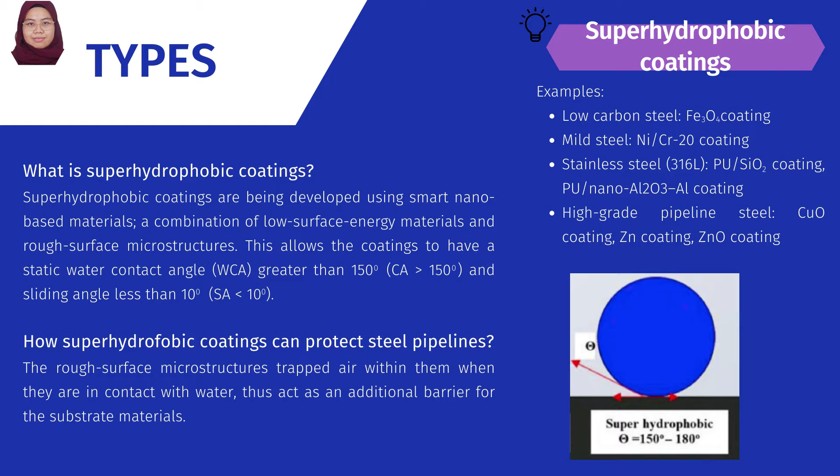How can superhydrophobic coatings protect the pipelines? The rough surface microstructures trap air within them when the coatings are in contact with water, thus acting as an additional barrier for the substrate material.

The second type of coating in the oil and gas industry is thermoset coatings, for example fusion bonded epoxy coating. A thermoset coating is made up of lines of polymers that are highly cross-linked by strong chemical bonds. Thin protective layers are produced on metallic surfaces.

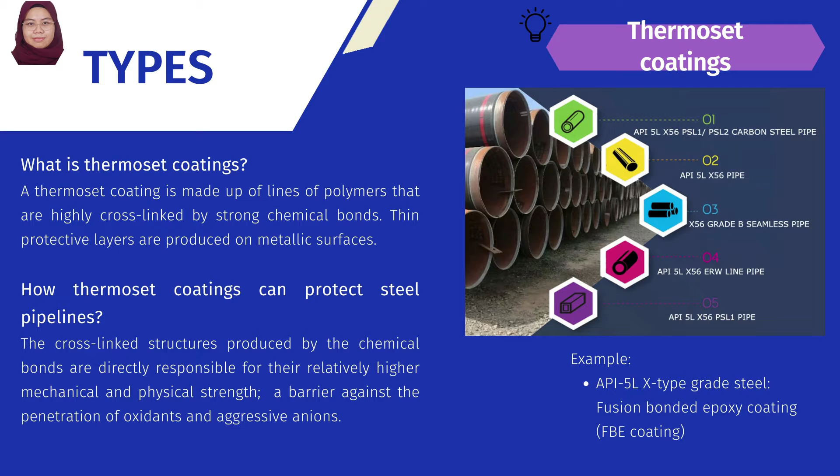How can thermoset coating protect steel pipelines? The cross-linked structures produced by the chemical bonds are directly responsible for their relatively higher mechanical and physical strength. It creates a barrier against the penetration of oxidants and aggressive anions.

Properties of polyurethane coating: polyurethane coating has excellent adhesion to steel, ductile iron, and concrete, combined with excellent chemical resistance, impact resistance, resistance to cathodic disbondment, and abrasion resistance. The fast-setting nature of 100% polyurethane coating also means they are very suitable for repeat application lines during pipe production, and they can be applied at any film thickness at virtually any temperature.

Moreover, the polyurethane coating can be used in conjunction with cathodic protection systems for protecting ductile iron and steel pipes, where the function of the coating is both to improve the degree of protection and also to reduce the capacity of the cathodic protection installation required to achieve complete immunity from corrosion attack.

Recent developments in 100% solid polyurethane coating technology have resulted in three innovations from which the water and wastewater industry can particularly benefit. First, the development of protective linings that incorporate antimicrobial additives. Second, altering the characteristics of the environment to eliminate the corrosive environment. Third, the development of edge-retentive polyurethane coating systems.

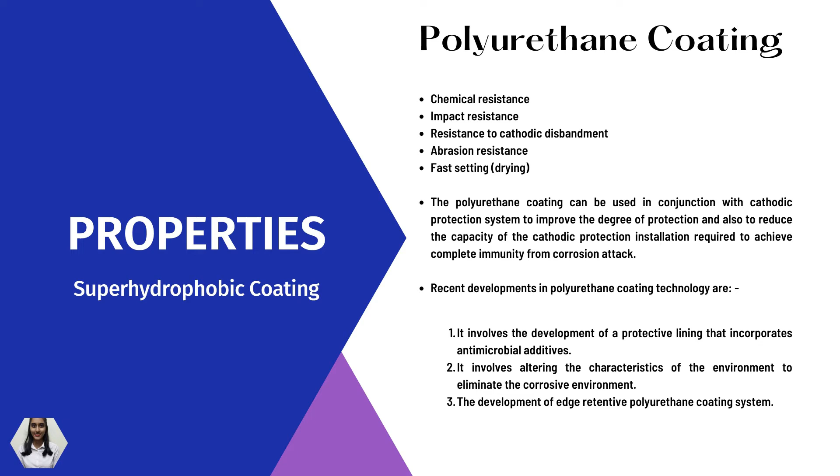Properties of copper coating: copper is a reddish-brown metal known for its excellent thermal and electrical conductivity. A common application for copper oil and gas plating is to prevent galling during make and break operations. A copper coating may be applied to parts and components such as premium threaded connections, couplings, risers, and alloy premium drill pipes for this purpose.

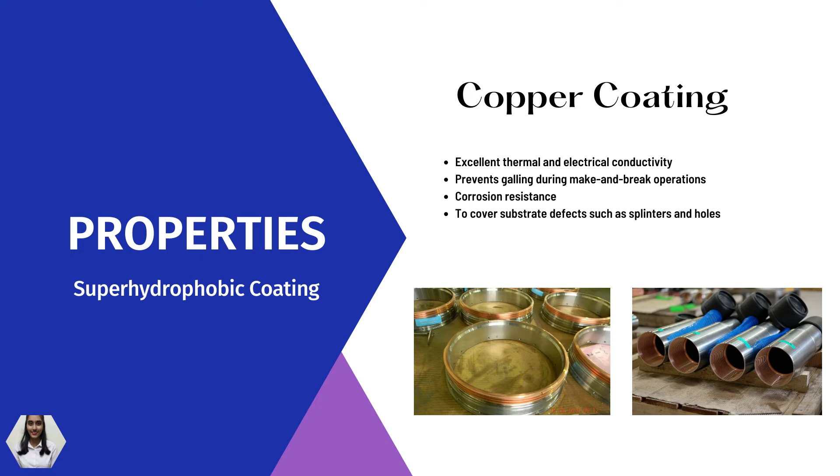Copper is also extremely useful as an undercoating for other plated metals to enhance rust resistance in high corrosion environments. When used as an undercoat, copper can cover substrate defects such as splinters and holes prior to application of the final deposit. Copper plating is compatible with many types of metals, including steel, stainless steel, and steel alloy, as well as aluminium and copper alloys.

Properties of nickel coating: nickel is a popular choice for many oil and gas plating applications because of its excellent anti-corrosion properties. A prime example is the selective plating of a nickel solution onto materials used in high chloride downhole operations.

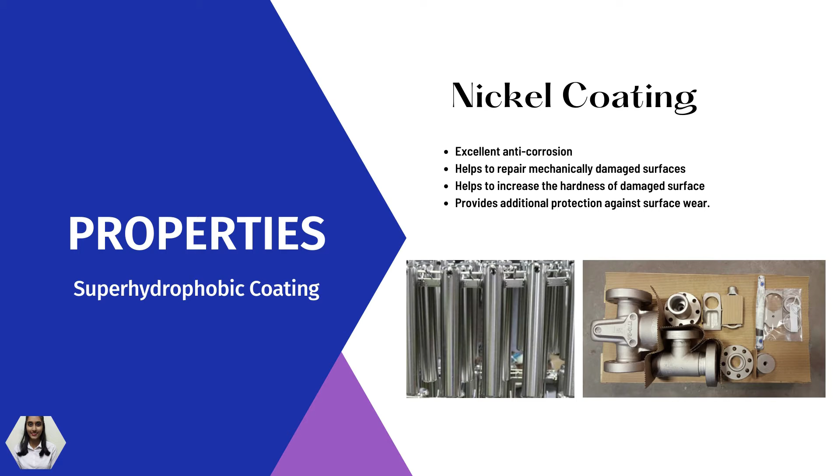Moreover, alloying nickel with copper is sometimes used to repair mechanically damaged surfaces in oil and gas operations. For instance, a plated nickel-copper coating can be applied to repair crown-mounted compensators on oil rigs that incur damage from a lightning strike. This plating technique increases the hardness of the damaged surface and also provides additional protection against surface wear.

Properties of fusion bonded epoxy: long-term corrosion protection. FBE has excellent adhesion to steel and provides superior long-term corrosion resistance and protection of pipelines operating at moderate temperatures for design life. Superior adhesion properties provide excellent resistance to cathodic disbondment, which reduces the total cost of cathodic protection during the operation of the pipeline.

Special grades of FBE are available for use at higher operating temperatures for coating of high-strength steels and other specific applications, offering good chemical and mechanical resistance.

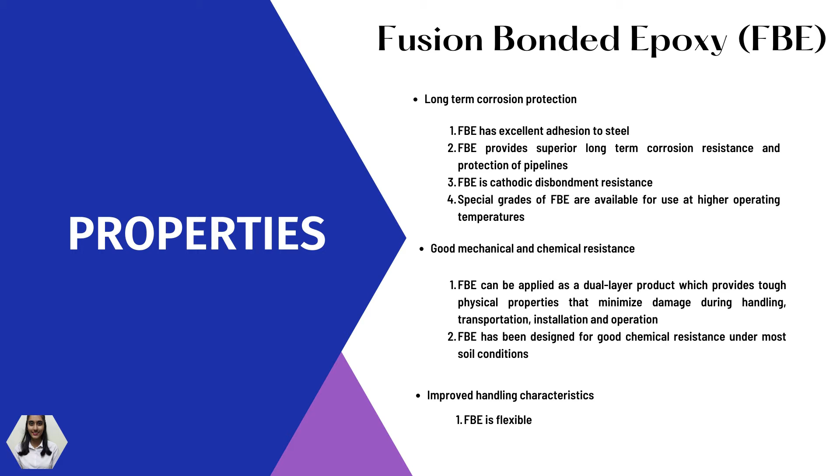FBE can be applied as a dual-layer product which provides tough physical properties that minimize damage during handling, transportation, installation, and operation. FBE has been designed for good chemical resistance under most soil conditions. Finally, improved handling characteristics: FBE is flexible and allows bending of the pipe for installations.

Method technology for surface preparation: blast cleaning. Blast cleaning is the most commonly used method for preparation of steel surfaces. It is efficient and economical compared to conventional surface preparation processes. It effectively removes rust, scale, slats, etc. from the surface and produces an industrial-grade cleaning and a rough surface finish.

The principle of blast cleaning is propelling abrasive media at a high velocity using compressed air in sandblasting or wheel blast machines onto the surface of a material. It uses abrasive materials like aluminum oxide, glass beads, and garnet. It is important to remove grease or oil contamination prior to blast cleaning, for example, by solvent cleaning.

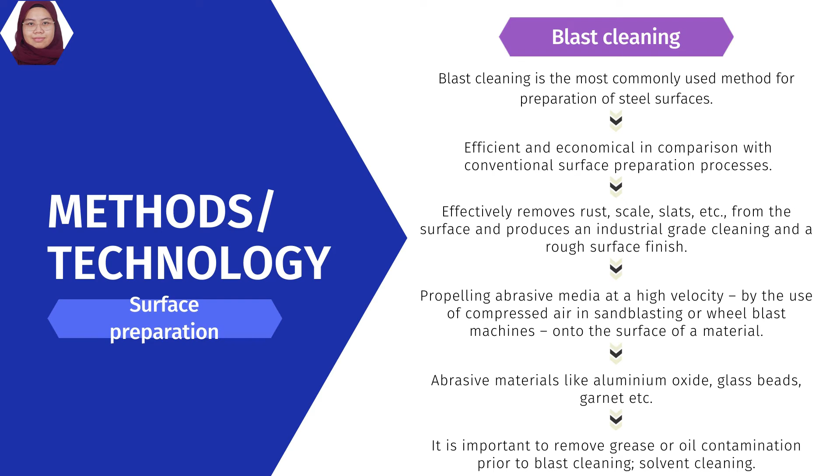Method technology for applying the coating: thermal spraying. Advantages of thermal spraying include reduced cost, low heat input, and versatility. Thermal spraying is the most versatile and widely used method.

The principle: semi-molten or molten particles hit the surface of the target substrate and become solid rapidly to produce a thin splat. Successive impingement brings about accumulation of the particles and interbonding among the splats. Classifications of thermal spraying include arc spraying, flame spraying, atmospheric plasma spraying, and many more.

For polyurethane nano-aluminum oxide aluminum coating technology, the fabrication process involves a two-step deposition process. First, aluminum coatings were arc sprayed onto stainless steel 316L plaques. Second, polyurethane nano-aluminum oxide composite deposition through a suspension flame spraying process.

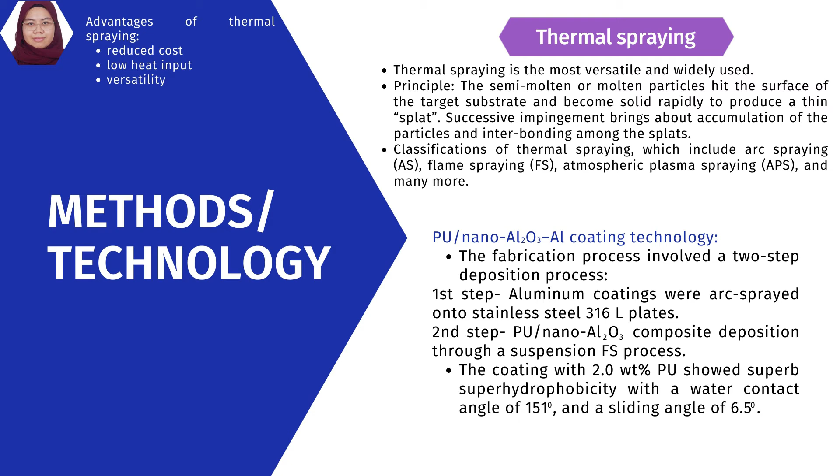The coating with 2% weight percentage polyurethane showed superb superhydrophobicity with a water contact angle of 151 degrees and a sliding angle of 6.5 degrees.

Sol-gel method. Advantages of the sol-gel method: cost effectiveness, easy controllability of electrical, structural, and optical properties of films, low process temperature, excellent homogeneity, applicable to substrates with complex shapes, and high-quality films.

The principle: it involves a chemical reaction that proceeds from a molecular compound or ion and produces a three-dimensional structure via the formation of an oxygen bond between the ions and the release of water or other small molecules. In short, it's a polycondensation reaction that results in a 3D network.

For polyurethane silicon oxide coating technology, the amphiphobicity and mechanical robustness of the coating were attributed to the strong bonding of the polyurethane resin to the stainless steel substrate and the micro-nanostructure provided by the fluorosilane silicon oxide nanoparticles. The coating had a sliding angle of 3 degrees and a water contact angle of 159 degrees.

While the oil droplet had a sliding angle of 3 degrees and a contact angle of 140 degrees.

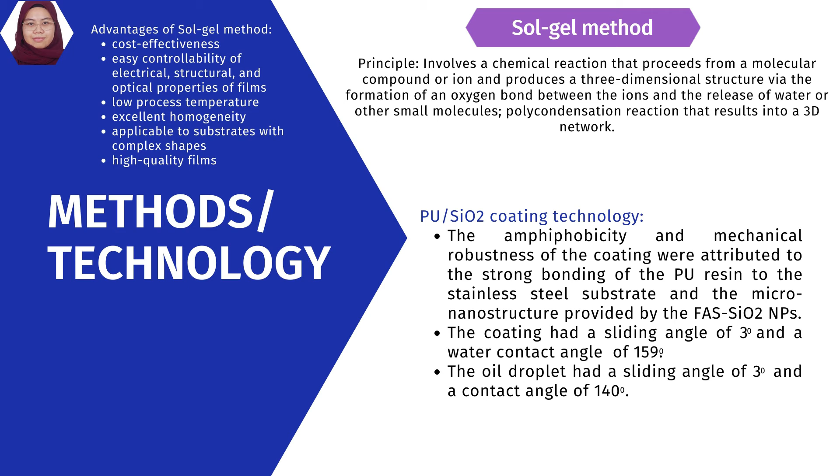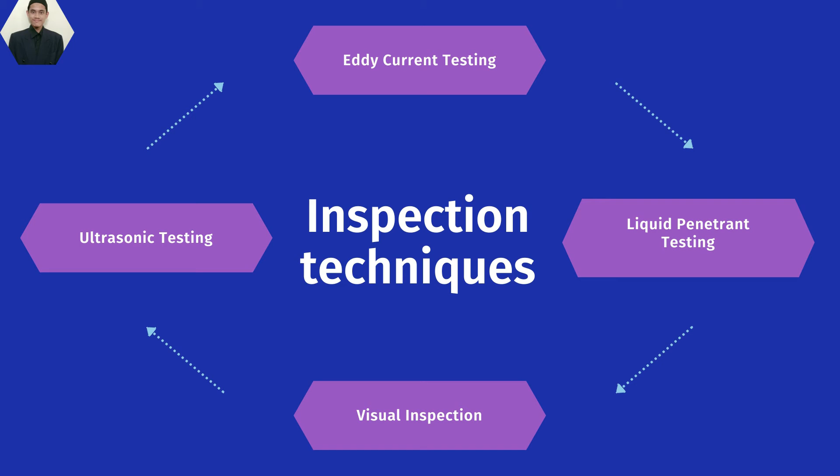Nowadays there are many inspection techniques used in the oil and gas industry. Four of them are ultrasonic testing, eddy current testing, liquid penetrant testing, and visual inspection.

First example is ultrasonic testing, or UT. This technique has advantages where it is fast, accurate, portable, and versatile. It transmits sound waves into solid materials and analyzes the reflected wave that returns.

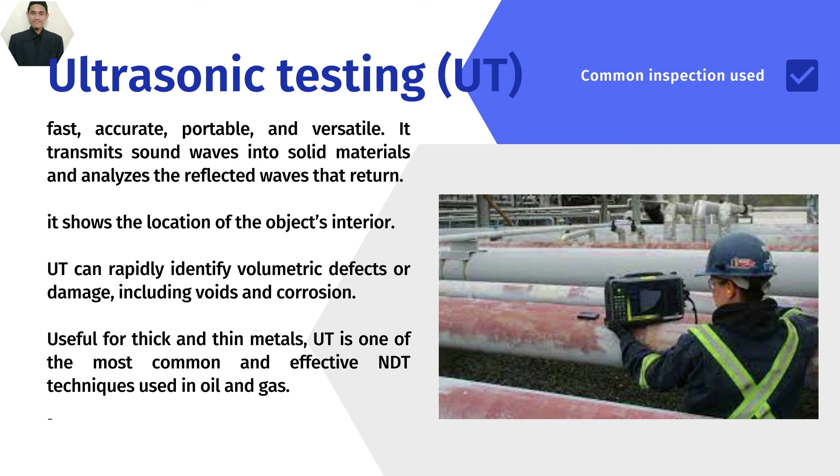This inspection shows the location of the object's interior defects. UT can rapidly identify volumetric defects or damage, including voids and corrosion. This technique is useful for thick and thin metals. UT is one of the most common and effective NDT techniques used in oil and gas.

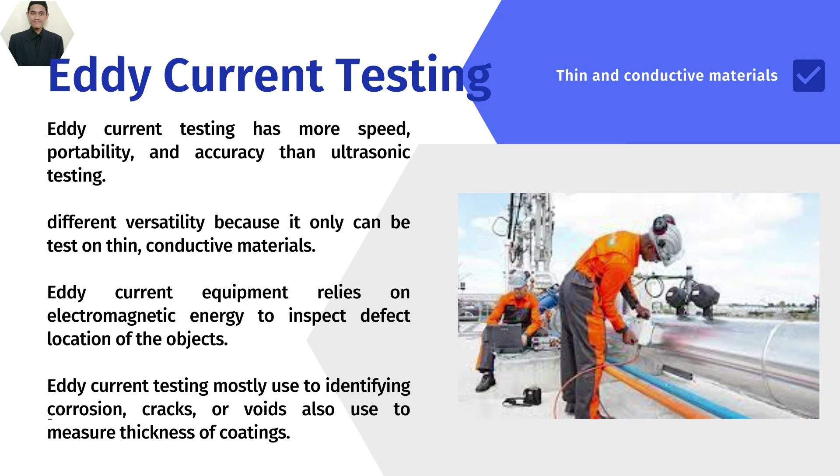Second example is eddy current testing. This technique has more speed, portability, and accuracy than UT, but has different versatility because it can only be tested on thin and conductive materials. Eddy current equipment relies on electromagnetic energy to inspect the defect location of objects. It is mostly used to identify corrosion, cracks, or voids, and also used to measure the thickness of coating.

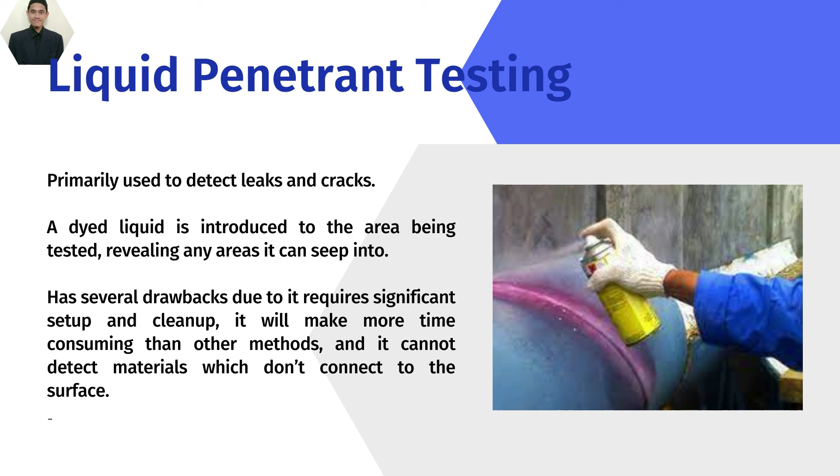Third example is liquid penetrant testing. This technique is primarily used to detect leaks and cracks. It uses a dyed liquid that is introduced to the area being tested, revealing any areas it can seep into. It has several drawbacks because it requires significant setup and cleanup, making it more time consuming than other methods, and it cannot detect flaws that don't connect to the surface.

Last example is visual inspection. This is the first and most common inspection technique used in the oil and gas industry. This technique is done by using close visual inspection to identify corrosion, cracks, leaks, and defects.

It is fast and inexpensive compared to other NDT methods, but it is limited to visual or eyesight ability, and even a borescope does not overcome this limit, which means other NDT methods are still needed to identify internal flaws before they reach the surface.

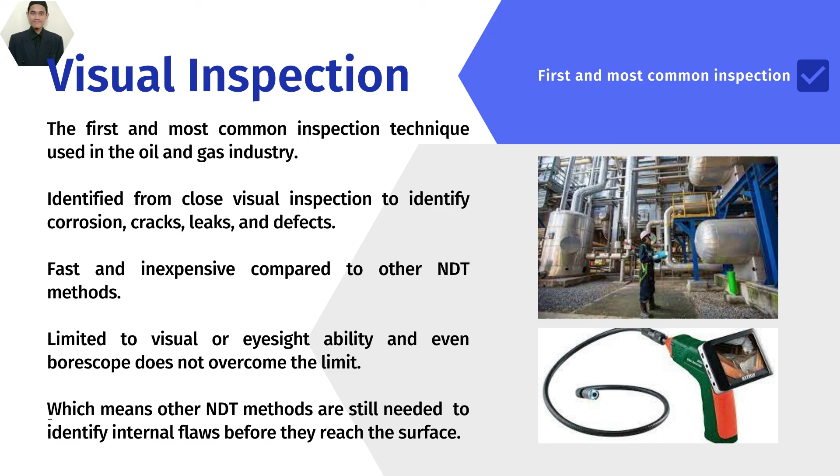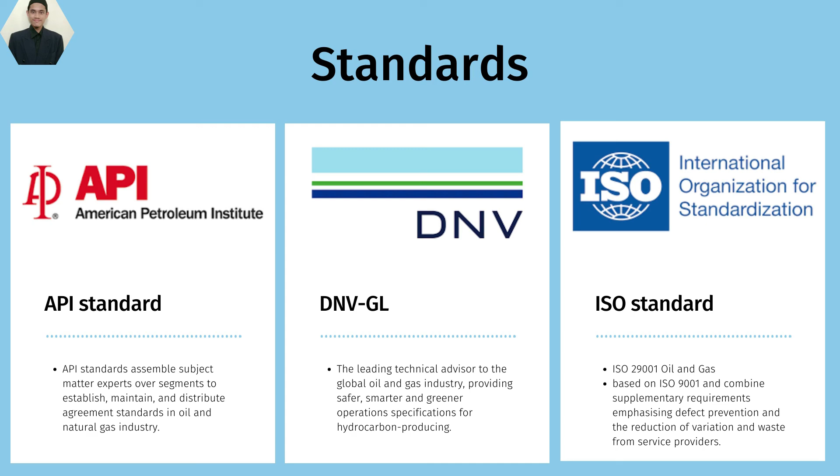For the standards in the oil and gas industry, three standards are the most widely recognized: API, which stands for American Petroleum Institute, DNVGL, and ISO, which stands for International Organization for Standardization.

Lifetime of oil pipelines is related to corrosive hydrogen environments that cause material degradation. After long-term operation, resistance toward fatigue crack growth of the pipeline decreases, hence allowing initiation of cracking.

Hydrogen-induced and stress corrosion cracking will affect the mechanical properties of the pipeline, thus increasing failure risk, and crack growth resistance is the most sensitive to operational time.